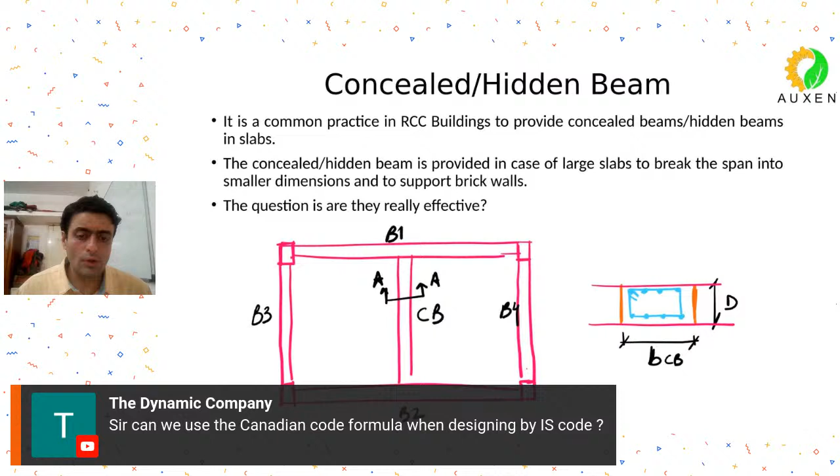So anyone would like to comment on this? So the dynamic company, his name on YouTube, asks: can we use the Canadian code formula when designing by the IS code? Good. So any comments on this concealed beam? Are these concealed beams effective to your mind? Are they effective in breaking the slab span? Are they effective in controlling the deflection? Anyone would like to comment over here?

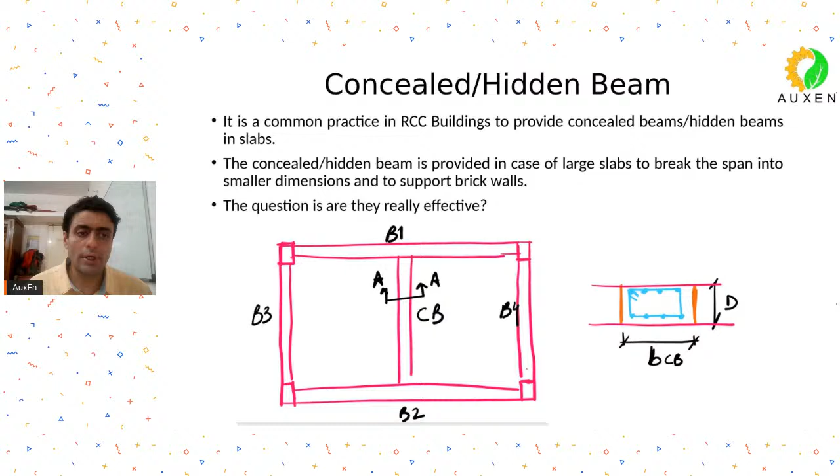Okay. So what we need to understand is that quite often the concealed beams do not have sufficient stiffness. Because of the small dimensions, they are generally flexible in nature. So if they are not sufficiently stiff, then you cannot expect them to provide adequate stiffness to the slab. You cannot consider them to be effective either in dividing the slab span or in controlling the deflection.

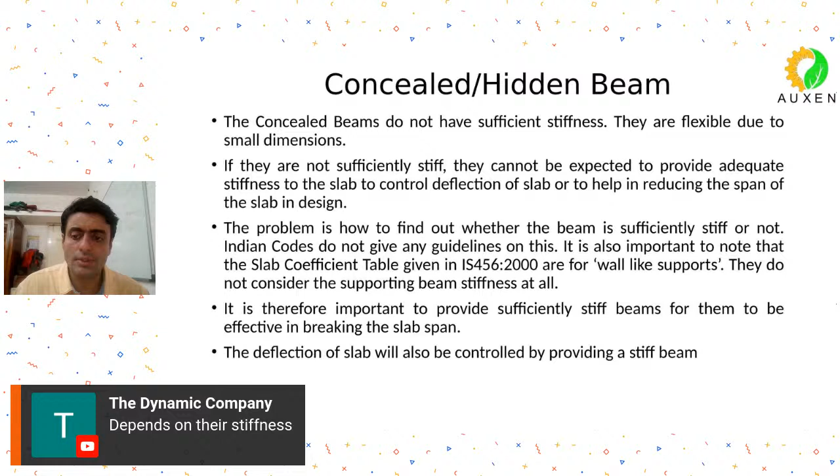But then the question comes to our mind: when can we consider a concealed beam stiff enough? When can we consider a beam stiff enough? That is the question that may come to our mind.

So when we look at the IS 456 code, the problem with IS 456 is that if you look at table number 26 given in IS 456, I think many of you are aware that IS 456 table number 26 is for wall-like supports. So the coefficient table that you have is only for wall-like supports. That means very, very stiff supports.

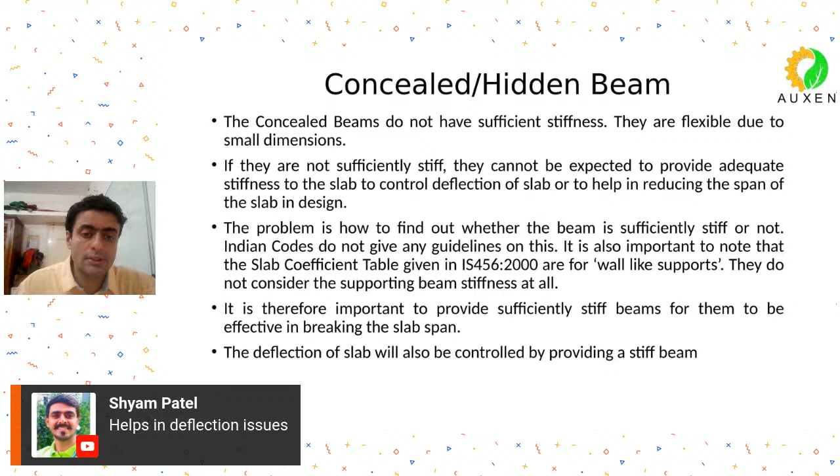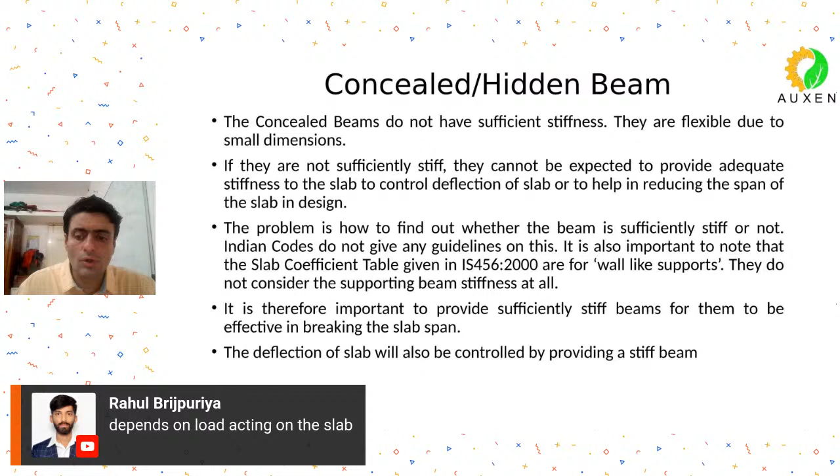So actually speaking, IS 456 does not consider the beam stiffness at all. If you look at the American code, American codes do consider the beam stiffness in their analysis and in their design coefficients. So actually, the American code does not have this technique of finding out the slab moments by the coefficient method. They just go for an equivalent frame method.

Yeah, you can see the comments that we are getting. These comments are not my comments. These are the comments of our audience, those who are joining us live. So not necessarily do we agree or disagree with these comments. I'm just trying to put these comments on the screen. All right. So these are not my endorsements. These comments are being received on the live chat, and we are just displaying them over here.

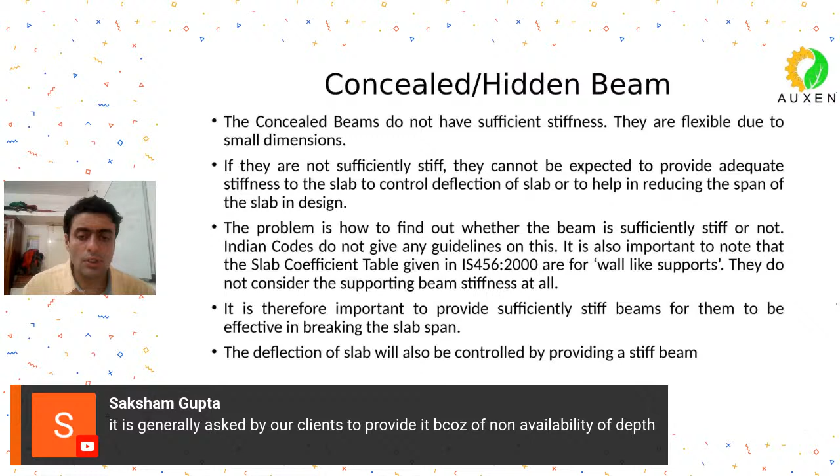Anyway, coming back, in the Indian code we do not take into account the stiffness of supporting beams. If you look at table number 26, it is only for wall-like supports. So we are in a fix whether or not the beam that we are providing is wall-like. Is it stiff enough? We don't know actually.

Further, we don't have much idea whether the concealed beam we are providing will be able to control the deflection. So for a beam to control deflection and to break the span of the slab, it needs to be stiff. But how to judge that? The Indian code does not help you, so then we take help from the Canadian code.

As one of you had just mentioned, I'll just go back in the chat. Dynamic Company, I don't know his name, he goes by the name Dynamic Company on YouTube. He said, can we use the Canadian code formula? So that is what I'm coming to right now.

So the Canadian code gives you a recommendation that the depth of the concealed beam, if it has to be sufficiently stiff, has to be greater than or equal to 1.26 times the depth of slab multiplied by (L/B)^(1/3), where L is the length of your beam and B is the width of your concealed beam.

All these clauses and this understanding, I got for the first time from the book of Pillai and Menon. Professor Pillai and Professor Devdas Menon wrote a very effective book on RCC design. I first read about this issue in their book, so thanks to them for creating such a wonderful book. I would strongly recommend that those who want to read an advanced text on RCC design refer to this book by Pillai and Menon, truly a masterpiece.

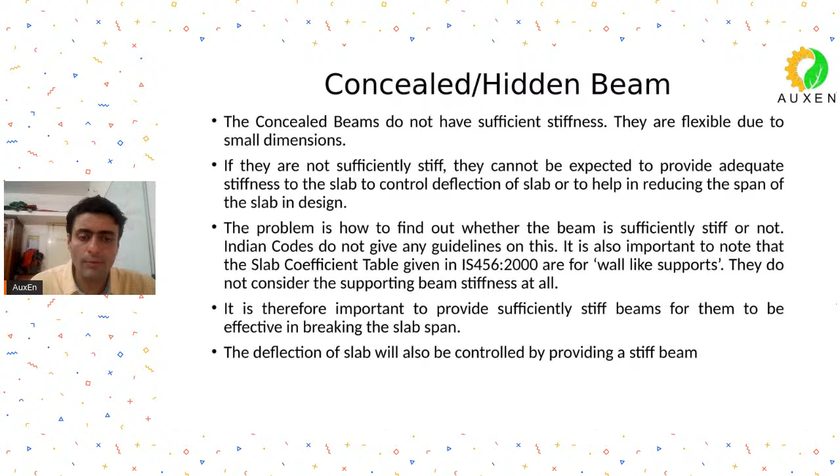Assume that the length of your concealed beam is 5 meters, the width of the concealed beam is 400 mm, and the depth of slab is 150 mm. Then the depth of concealed beam required would be 440 mm. Imagine, if you are providing a concealed beam width of 400 mm, then for a 5-meter beam you would require a 440 mm depth. We don't provide those sorts of depths.

We will provide, let's say, the concealed beam depth equal to 150. So if this is not being followed, then your beam is not sufficiently stiff. If your beam is not sufficiently stiff, you cannot expect it to provide effective resistance to the slab deflection. Neither can you expect that beam to help you to break the slab span.

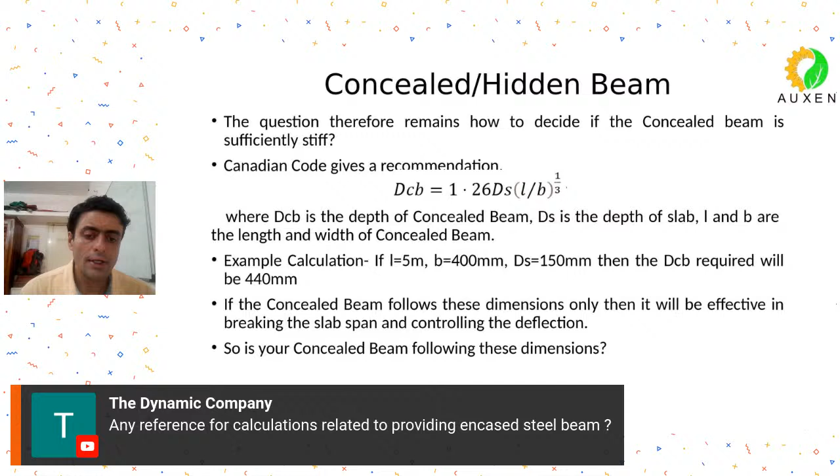The dynamic company is asking, are there any references for calculations related to providing encased steel beams? See, for encased steel beams, one reference is that because these beams will be totally encased inside the concrete, you can take them as laterally supported. If you have gone through steel design, there are two types of beams: laterally supported and unsupported. So because our steel beam would be completely inside the concrete, you can effectively take them as laterally supported beams, and you can find out the moment capacities accordingly.

Other than that, I would say that you can refer to some European codes or British standards which deal with composite beams. In Indian standards, you don't have composite beams covered in any of the codes. So you can refer to EC 1994. I am not remembering the part number, Eurocode 1994, I think part number 4 or 5. So that covers the composite beam design. So you can refer to those things.

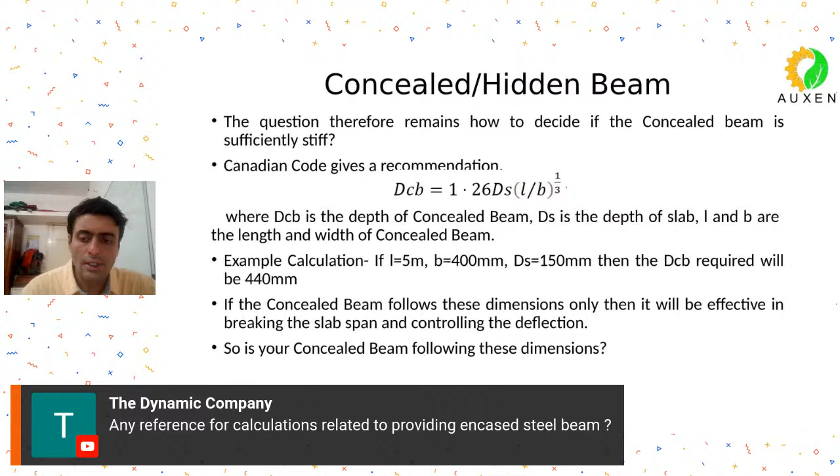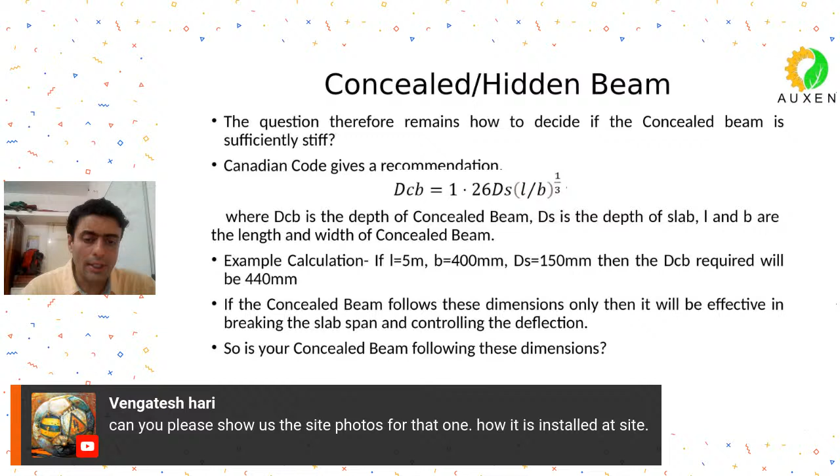Mr. Vengatesh is saying over here, can you please show us the site photos, how it is installed at the site? Yeah, right now I don't have the ready photos, but I will try to bring them for the next episode. Yes. Okay. So this was one of the problems that I thought we should discuss.

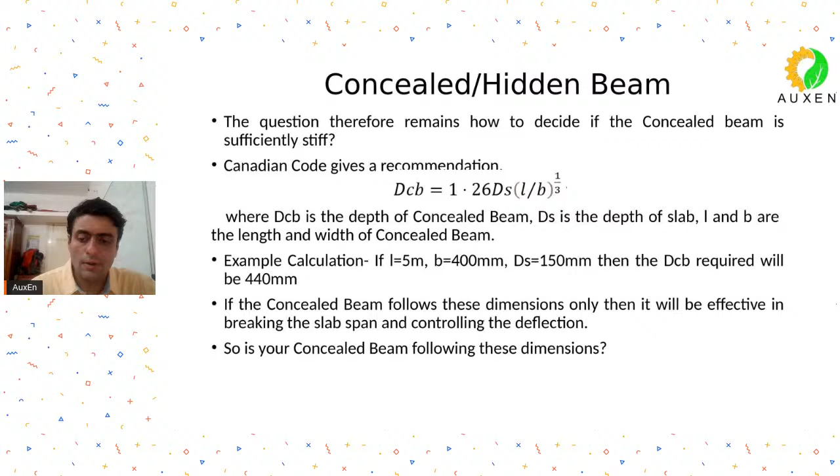The next problem, for those who have been using ETABS for RCC design, is another problem we quite often face, where we often complain that the ETABS column design is very heavy. It requires more reinforcement percentage.

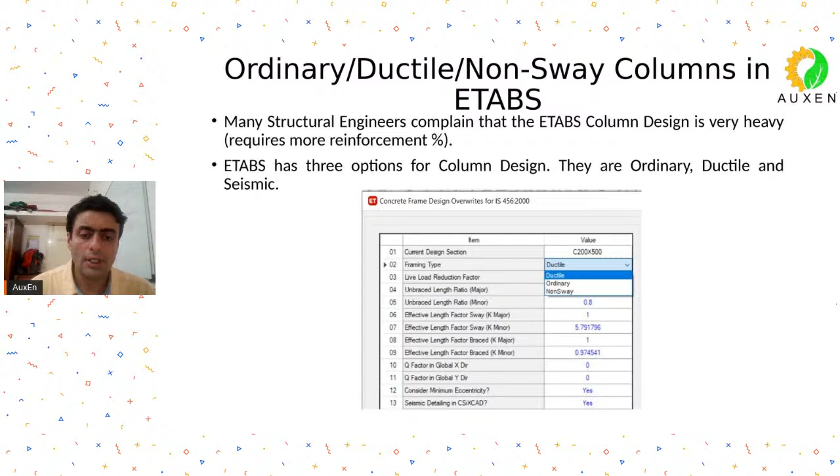Why are we discussing this? Because this is quite often the problem faced by engineers: when to take which option. So people, you can write your thoughts about this issue: when to choose ductile, when to choose non-sway, when to choose ordinary, and what happens when we select a particular option. If you have any thoughts, you can just type in.

Okay, so ductile column in ETABS, when to select this option. Whenever you are designing your structure and IS 13920 is applicable for that structure, then you should design it using this particular option. When you choose this ductile option, again I am repeating, this is chosen as an override. So you have to select all your columns in ETABS, then you go to the overrides option, and then you select a particular override.

So if IS 13920 provisions are applicable for your structure, let's say you are in zone 3 and above, or your structure is greater than 15 meters in height in zone 2 and above, then 13920 is applicable. And if it is applicable, then you should go with the ductile option. One important thing to understand: the ductile setting is the default setting in ETABS. So whether or not you choose it, ETABS by default designs columns as ductile.

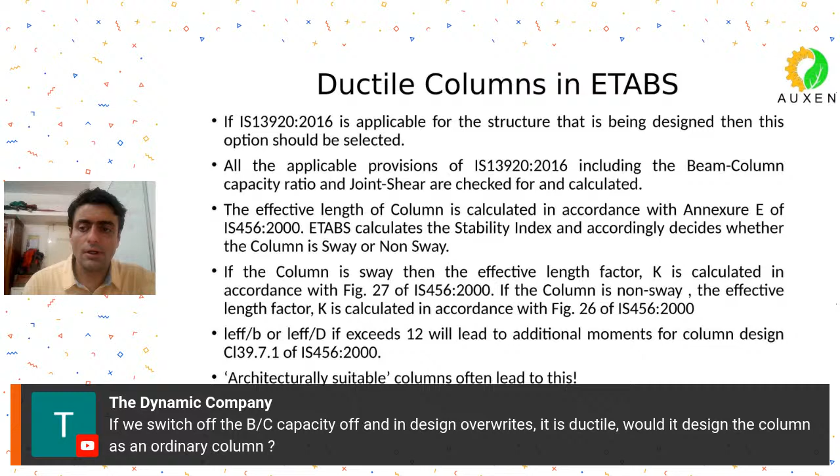Okay, ductile columns. These days, in the newer versions of ETABS, you have the option to turn off the beam column capacity check in the design. So if you want to not check your column for the beam column capacity ratio as per IS 13920, you have the option to turn it off. But you should not be doing it if you are designing it as a ductile column. It is not advisable to skip the beam column capacity ratio check. Anyway, this is about ductile columns. Till now there's no problem if we have applied earthquake loads.

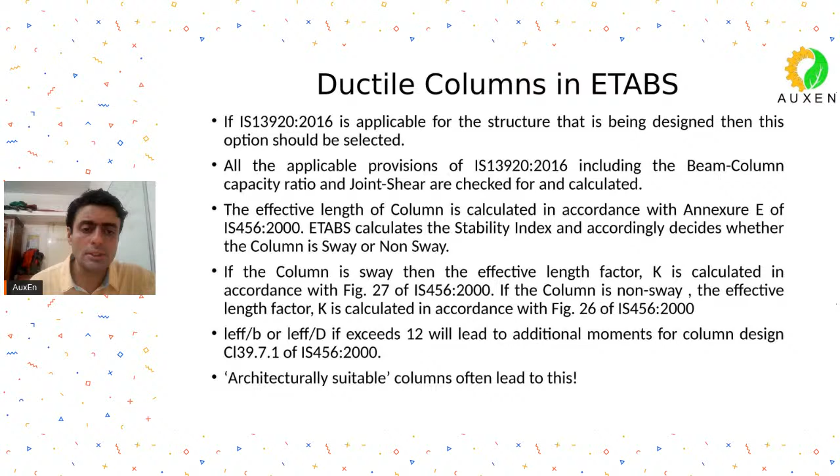If you are designing your structure as per IS 13920, you have to apply earthquake loads, then there is no problem in choosing the ductile option. The problem occurs when you are not designing a structure for earthquake. Okay, so suppose you are in zone 2 or in lower zones, or you are designing a structure where you think that earthquake loads are not required.

Let's say you are designing a small residential project. I'm not saying by this that residential projects are not important, but for small residential projects generally we will not apply any earthquake load as such. Okay, so if you are doing those sorts of designs where you have not taken IS 13920, or you have not considered earthquake loads at all, that means you are just designing for dead load, live load, then the actual problem appears.

So what did I tell you? The default setting in ETABS would be what? What would ETABS be doing as a default? It would be designing the columns as ductile columns, whether you apply anything or not. So as a default setting, it will try to design it as ductile. So even if it tries to design it as ductile, or if let's say you have not defined the earthquake loads and it is trying to design it as ordinary, even in those two situations, ordinary or ductile, if you have not applied earthquake load, then the default setting in ETABS, listen to this carefully.

The default setting in ETABS is that it will not calculate the stability index, and it will consider your column as a sway column. Okay, I'll repeat it. Suppose you have not applied the earthquake loads, and you decide to design your columns, and right now they are being designed as ductile columns, or even if you change them to ordinary columns, ordinary means designed by IS 456 alone. So even if you choose ordinary or ductile and you have not applied the earthquake loads, then ETABS considers as a default setting the columns as sway columns.

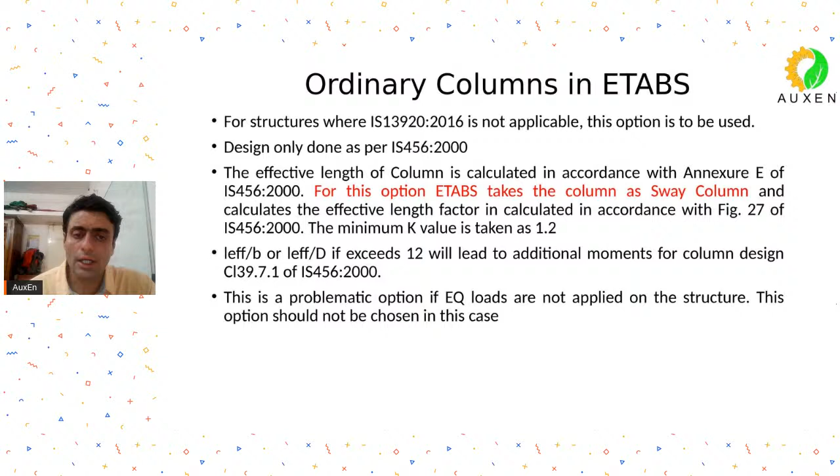So then what do you do? It is better in that case to design your columns as non-sway. I'm talking about small structures where you are mostly in zone 2, where you do not apply earthquake loads and you have chosen to design without earthquake loads. So if you choose to do that, always go to the overrides and select your columns as non-sway.

So when you do this, ETABS takes the columns as non-sway columns. Then it will calculate the K in accordance with figure number 26 of IS 456, and accordingly the L effective by B or L effective by D ratios will be calculated. So this option, to summarize, should be chosen when not designing for EQ loads. Okay, very important.

So this is what I had to tell you about the ductile, ordinary, and non-sway columns. If you are designing for earthquake loads, very simple, go ahead with ductile. ETABS will automatically consider all the provisions, all the clauses of IS 13920. Very simple. But if you are not designing for earthquake, do not choose ductile or ordinary options. Then go for non-sway.

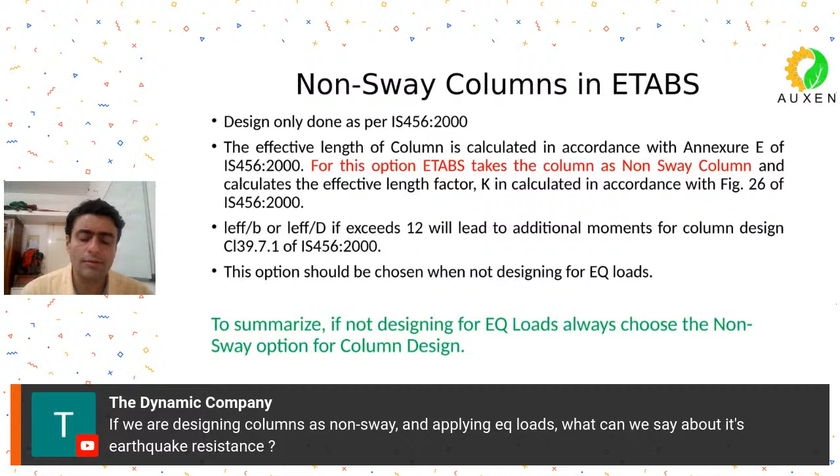What you can do is, if you see that your stability index is coming to be greater than 0.04, then you can try to reproportion it maybe. See, in the end, you design it as non-sway, but at least try to reproportion it. That would be my suggestion. So if you are designing columns where you are applying EQ loads, but designing them as non-sway, that is not a good practice. At least let ETABS calculate the stability index to give you a good idea.

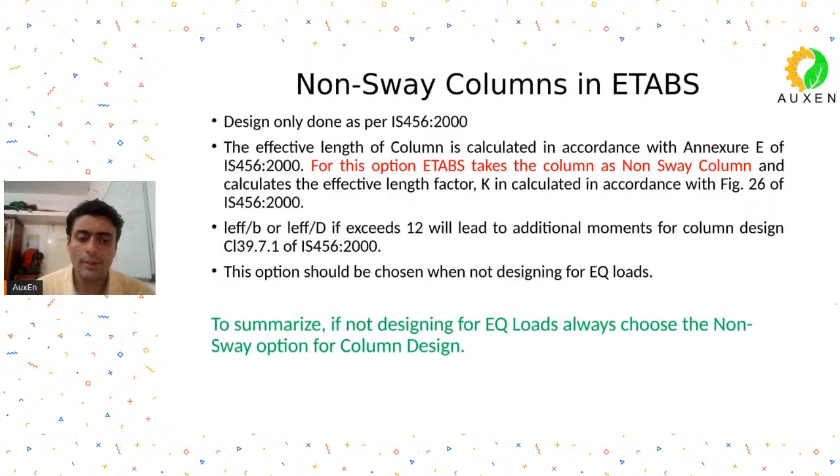Okay, right. So this is what I had to say. So these are the two problems in our first segment that we took in today's episode. Now, any last comments before we move to the next section? Okay, so this was our segment where we took the commonly faced problems by structural engineers. Now we will move to the next segment where we will be listening to experiences, and where we will be listening to the learnings from a fellow structural engineer.

So, why are experiences important? Because whatever you do, whatever you learn, in the end, whatever remains are only the experiences, isn't it? As Sri Krishna says, Sarva karma akhilam partha jnane parisamapyate. So, whatever you do, in the end, only the knowledge remains and the experience that you derived from it remains. So whenever you meet someone, don't ask them what they have done, what are their achievements. Ask them what are their key learnings or what have been their experiences. That actually teaches you a lot. So keeping these things in mind, in this segment we will try to invite structural engineers from different backgrounds who are doing different work, and we will try to learn from them.

So, in this episode, we have invited engineer Sandeep Dev. He is from Tripura, and right now he is a structural design engineer working at the Siddha Group, Kolkata, and he is a very well-known face on YouTube, on LinkedIn. He is the founder of Illustrica, a very popular online learning platform for structural engineers, where he conducts some very good online courses. He is a YouTuber and a blogger also. So it's great to have him today for this episode. So let us hear it from him. Presenting to you, Sandeep Dev.